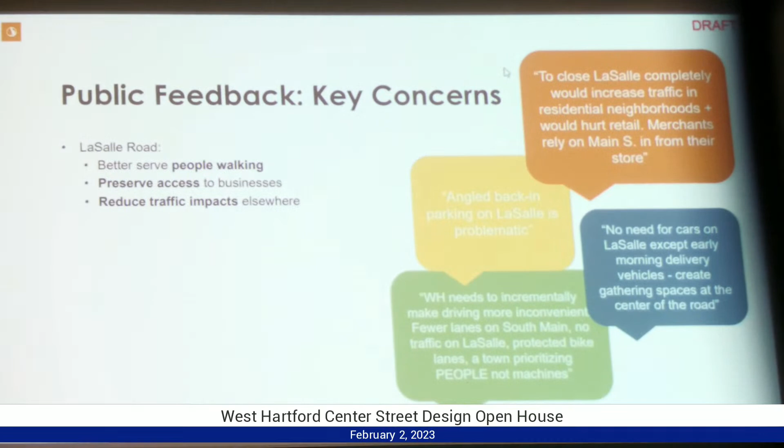Specifically regarding LaSalle, we heard a lot of conflicting things: we should close it, we should make it fully pedestrian, we should keep it one way, it's great the way it is, or we should return it to two-way traffic flow.

So lots of different, contradictory opinions as to why each of those was the most important to focus on. Similarly, we heard about the walking environment and the bicycling environment, and once again there were some contradictions in the feedback and suggestions that we got.

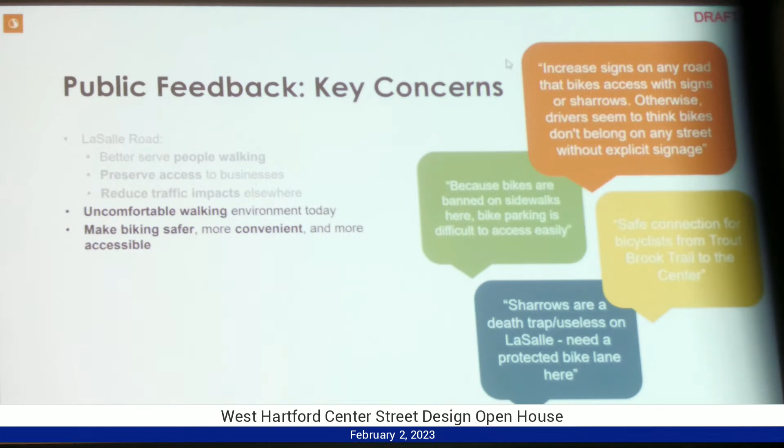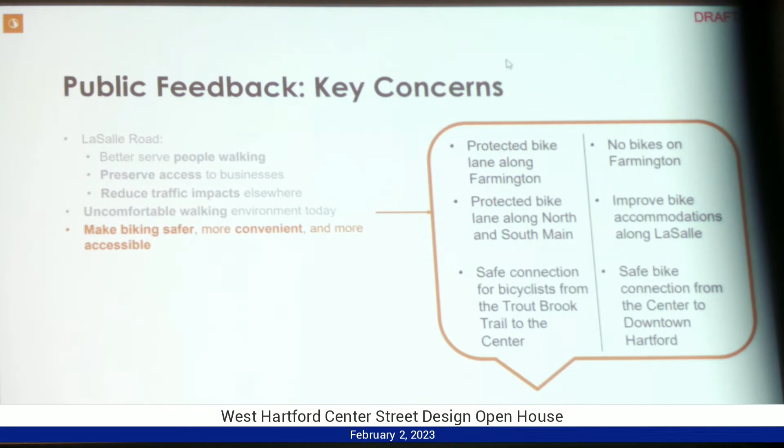So for biking, we heard protected bike lanes on Farmington should be a key link. And I don't want to see a bicycle anywhere near Farmington, that's not a safe link for people on bikes. We heard about a desire for improved bicycle connections along LaSalle for a north-south connection, as well as improved bicycle connections along Main Street for a north-south connection. So you see there are, again, differing opinions here on the bicycle network.

And again, we heard about excessive traffic and speeding and a desire to mitigate that in some way, as well as a desire for more open space to rest and interact, more benches to sit on. So we'll talk about that as we move through some of our ideas.

So I want to quickly walk through the goals that we set out with as we began this project. You as a community have come together over the past 4 or 5 years, specifically through the town center planning process, as well as the Plan of Conservation and Development. And together you've all developed these goals.

So we took these high-level planning goals that are meant to apply to land use, to zoning, to open space, to mobility throughout West Hartford, and tried to understand what those would mean for street design in West Hartford Center. We also asked folks to rank those goals.

So at the last public workshop, people had an opportunity to do so, as well as online after the public workshop. And interestingly, the goals that rose to the top were facilities and infrastructure, economic development, focusing on neighborhoods and housing for all, and finally open space and environment. So just an interesting look at what priorities are when thinking about the town center.

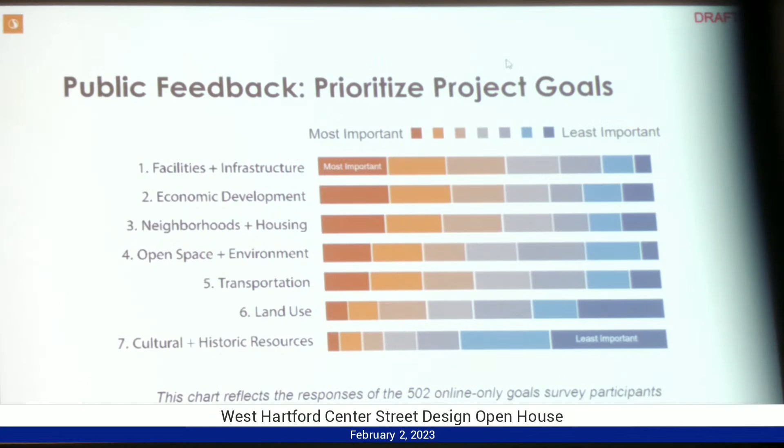So what do each of these mean for street design? For facilities and infrastructure, what this means when we think about operationalizing it into street design is thinking about planning for the future, thinking about electric vehicle charging and information and communication being built right into the street, so you can do things like real-time parking availability, real-time transit availability, and much more.

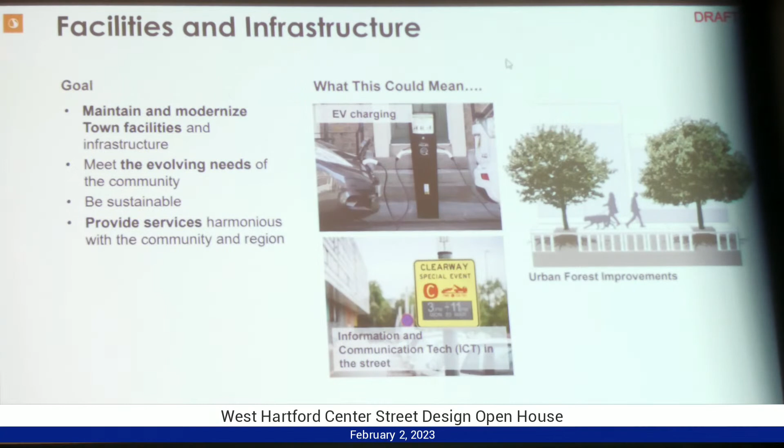It means thinking about also improving the technology that we use for plantings and tree support. That has come a long way recently, and Travis will talk a bit more about that.

For economic development, to us, what that means is using street design to promote commerce, to create space for outdoor dining, as well as to make sure that we're protecting local neighborhoods from traffic, maintaining the character of what makes West Hartford great.

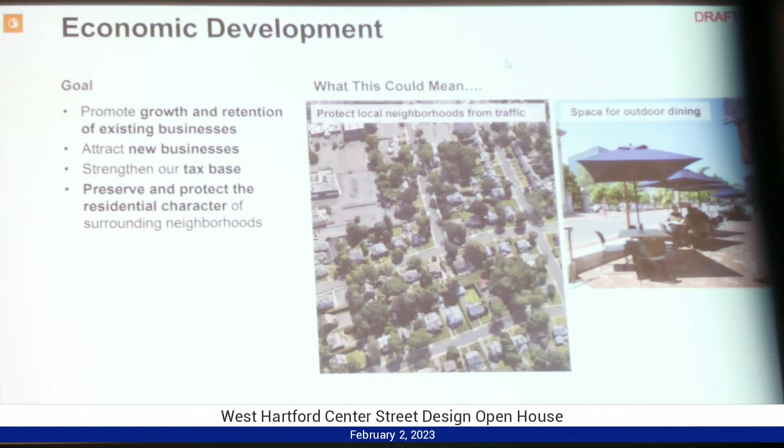For neighborhoods and housing, again, this goal was interestingly focused on creating housing for all ages. So to us, what that means is streets that are accessible to people with all different types of mobility needs, as well as interactive spaces and streets that support walking and housing downtown, so folks who live downtown can also walk to destinations downtown.

For transportation, this goal is great. It sort of hits on all the elements that we like to think of when we think of transportation in the future. But to us, what this goal means in terms of facilities on the street is planning for new transportation technology, planning for what's called an 8 to 80 bicycle facility, so a bicycle facility that an 80-year-old would feel comfortable using and a bicycle facility that an 8-year-old would feel comfortable using. And if you can plan for those two users, you can plan for all users to be comfortable.

Thinking about bus amenities, what do we have for transit users? You guys actually have relatively frequent transit service through the town center, so are we capitalizing on that? And of course, thinking about, most importantly, prioritizing safety and walkability, and getting around on 2 feet or rolling or however it is.

Open space and environment is a really important goal, particularly when it comes to stormwater management and planning for the future.

So on the street, that means space for bioswales that can help process stormwater and green infrastructure. It means infrastructure to support healthy tree growth and a good tree canopy, which provides shade, and thinking about opportunities for pocket parks, where can we squeeze in a little additional green space along the way.

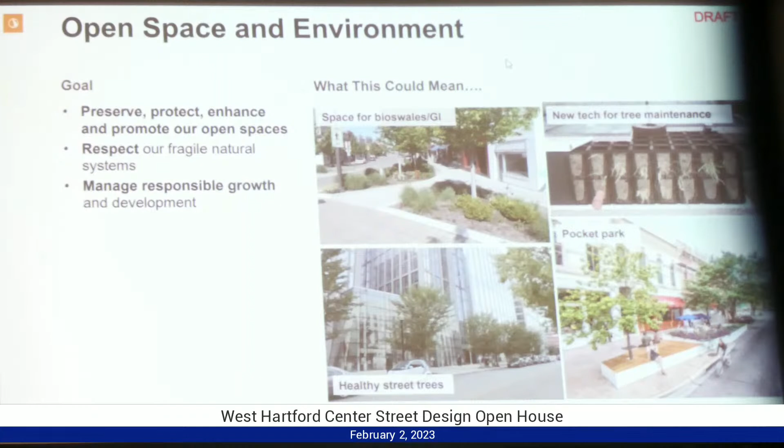Your land use goal is very smart growth oriented, so trying to think about density and walkability. To us, that translates to being able to walk to multiple destinations comfortably and directly, not having to walk around a giant super block kind of thing.

Cultural and historic resources. In the downtown, you have some great historic resources, so trying to think about integrating those into the street design as well as making them accessible to folks who are walking around West Hartford Center. Today it's a bit challenging to get to Unity Green, for example. How can we better integrate that into the town center?

So I think with that, those are all of the goals that we kind of had as our canvas as we set out to develop our designs. And now Jason is going to talk a little bit about some of the technical analysis that we've done.

Thank you, Liza. So we're starting with vehicles because that's the thing that everybody's always worried about. It's the number one concern that comes up in the transportation planning and engineering trade. But frankly, it's changed a lot over the last 10 years. Over the course of the last 20 years, we've been much more focused on other modes of transportation, but recently it's all about safety, and making it work for all modes as safely as possible.

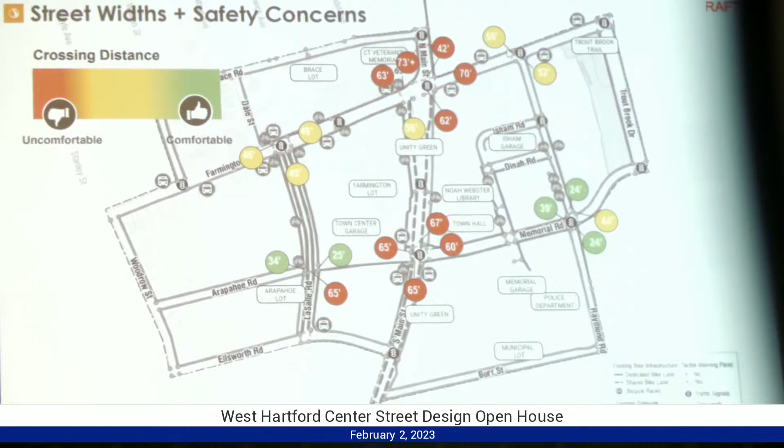It's that the intersections are too big. All those little dots are the lengths of the crossings. Even where you may have a median breaking it up, say the north side of Farmington when you try to cross Main, it's still a lot of distance, over 100 feet from one side to the other. So we look at any gap that really breaks a good 20, 30-foot crossing as a threat, and you've only got a few of those in green. Yellow gets to be a concern. All those large intersections directly correlate to those crashes, and that's something we know we need to re-engineer and think about what's going on.

One thing you all need to decide, and is influencing our design, is how much should we care about letting people from out of town blow through? Now, admittedly, some of them may be residents just trying to get home from Hartford, and they come through on Farmington. But in the town center, is it appropriate that we have roadways focused heavily on this movement, or should we be thinking about them a little bit more as a place?

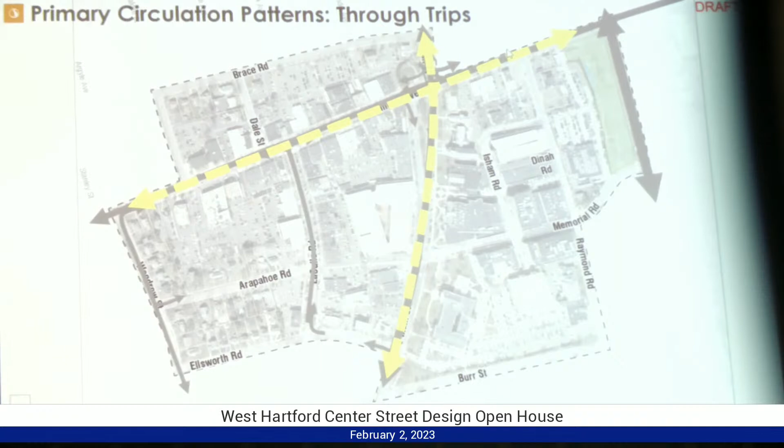And so there's also things about place that are important. There are employees coming in and out - that's probably the second greatest amount of traffic pattern that we've seen circling around. You actually see this funny little circle coming out of the town center garage and looping around all the way down to Ellsworth and up LaSalle. That's actually because they can't go through on Memorial to get to the west, and they don't like to turn left and left through Farmington. So that's something we've thought about, is how can we connect Memorial maybe to relieve that pressure, though it's only on Ellsworth, but it's something to think about.

But then the other big and often most publicly perceived traffic circulation is actually hunting for parking. And regardless of where you're going, that big central block, this whole area here is actually more or less a super block. You can't drive through. You can sort of cut through a parking lot.

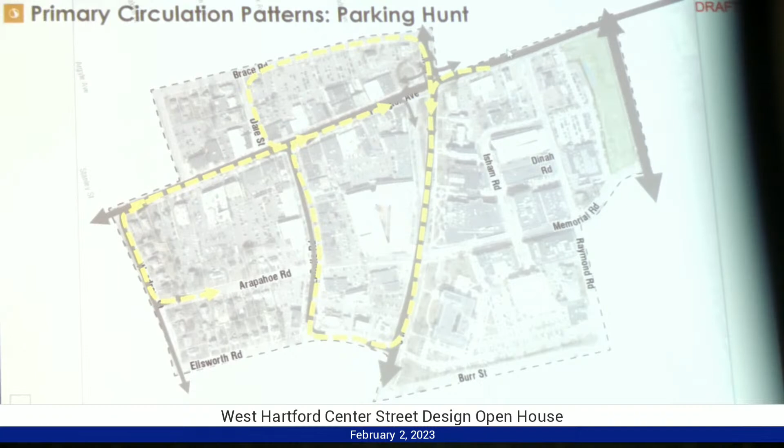That means there's a lot of circulation hitting all those intersections out there when people try to find parking. They may come around on Brace, and they may go past because they can't turn down LaSalle now to hunt for parking. There's a variety of those moves that we saw. And the parking hunt in particular is interesting because we all know that's important for businesses.

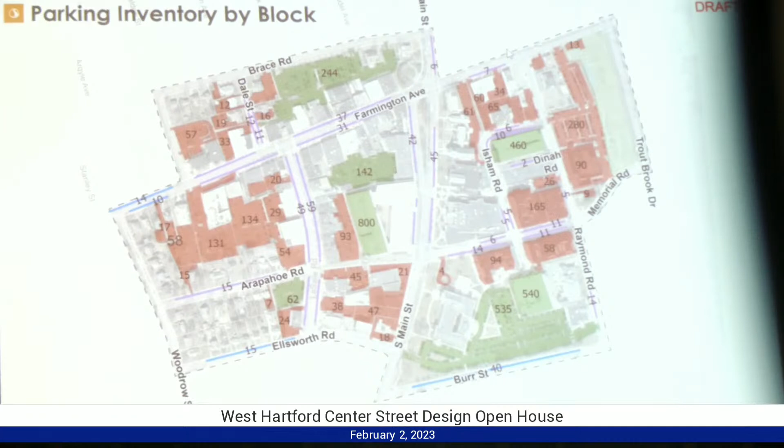It's important for the vitality, and it's important for residents to be able to get downtown. But there's actually a lot of parking, so they're hunting for something. They're usually hunting for a convenient on-street space, because if I were to summarize that detailed inventory map, this is sort of the block-by-block summary, there's a lot of parking. Combined in this whole study area, there's over 5,000 parking spaces, and it's actually well divided. Those garages over in Blueback Square make you think there's more there. Actually, Town Center Garage and the lots over by Town Center have a pretty good amount over here on this half too, and it's actually really well located.

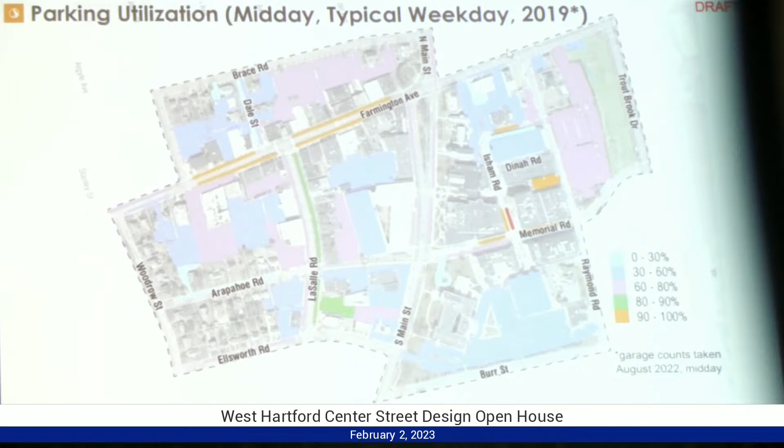When people think about parking and access, they also think about what they pay. When I look at the prices for all of these things, they're actually sort of flat. That's one of the problems we've determined. This is a heat map of utilization of all those different places to park. Where it's orange, it's really heavily utilized, but where it's blue, it's not as well utilized. You'll see the garages in the center of the blocks have those blues. I'll summarize it a little more cleanly.

In the middle of the day, this is data from back in 2019 when we were really robust and busy for parking. We're probably close to that again now. You can see Farmington Avenue gets pretty busy. The Blueback Square on-street area gets a little bit. LaSalle's not quite there, but notice the garages - in the middle of the day the garages are really not being heavily used at all.

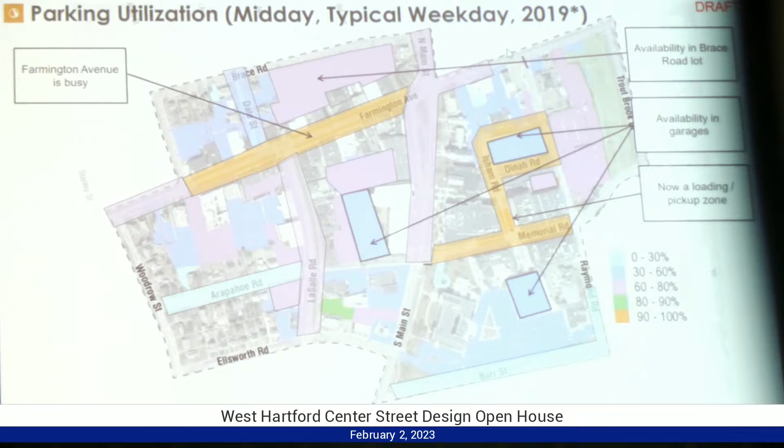Your problem is at night, right? The streets are filled up. Look at all that orange. All of a sudden, all those streets, you can't find parking almost anywhere. But look at all the empty spaces - there's no less than 1,500 empty spaces in downtown West Hartford. So everybody's running around, driving on your streets, looking for parking because they want the front door space.

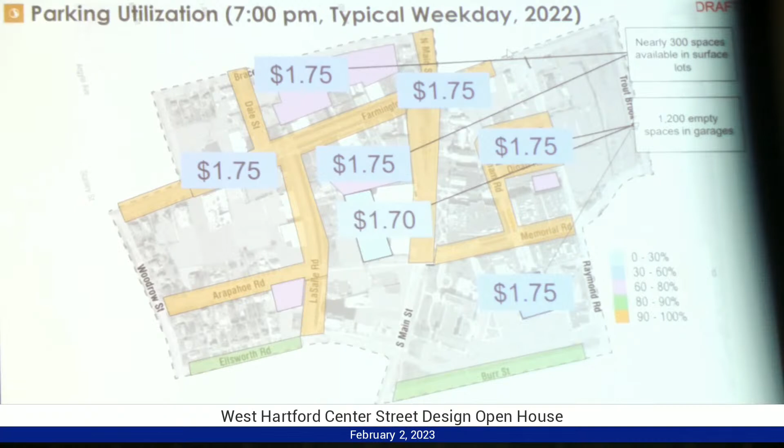My goodness, can't we just make it easier to find a garage space? Can't we, through maybe an infrastructure master plan, make it easier to want to walk to a garage, make it more visible? Maybe we as planners should rethink that pricing, and instead of just having a flat rate, maybe change it so it's a little more expensive on the streets and actually really cheap in some of the garages. Tiered pricing is a very strong best practice, and in most communities it creates the availability folks want and actually encourages more people to come into your downtown.

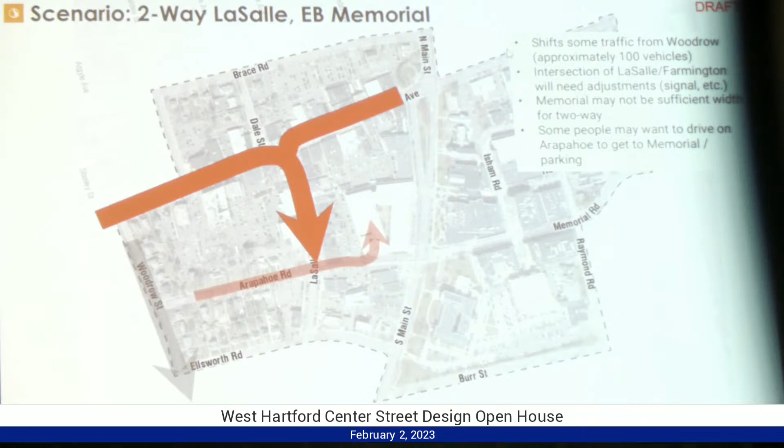If we only did the two-way, which is another option we're thinking about, that makes a lot of sense, and we're suggesting this to the town that we like this option maybe the best. There might be some people who come across, but that volume is really no different than exists today for the most part. So you'd be able to pull a lot of the pressure with a two-way LaSalle off of Woodrow.

We also looked at closing LaSalle. A lot of people mentioned this. To be clear, when you have special events or things going on LaSalle, particularly on weekends, it's an excellent street for doing that, and you'll see as we get into the design we've made it even easier and better to do that. But if you were to close it in this PM peak hour of traffic, the impact on other streets, particularly a street like Woodrow, would really be significant because people just can't get through.

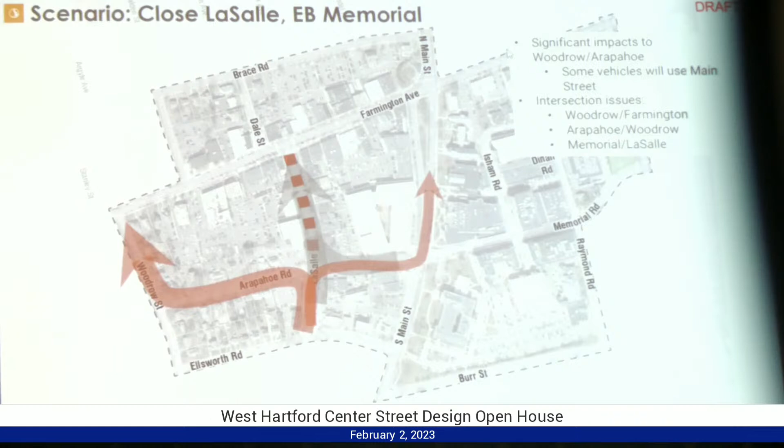There's just not enough breaks in that big super block, even if I opened up Memorial, it's going to be really impactful. The other reason why we know that closing off LaSalle all the time is problematic is that in about 90% of attempted pedestrian mall street closures in America over the last 40 years, they failed. There's very few that were kept in place, so many were removed, and many transitioned to temporary closures, which is a good solution. But we know that if you take a lot of cars off the street, you take a lot of eyes off the street, and you take a lot of activity off the street.

It doesn't mean everybody should be driving, for sure. We want them more to walk. But this is still America, there's still a point where people arrive by car. Until you have all sorts of light rail and lots of bike facilities and everything coming into here—and we're about to talk about bike facilities—we should probably not think about closing it down entirely, but we may want to think about closing it down periodically, even weekly.

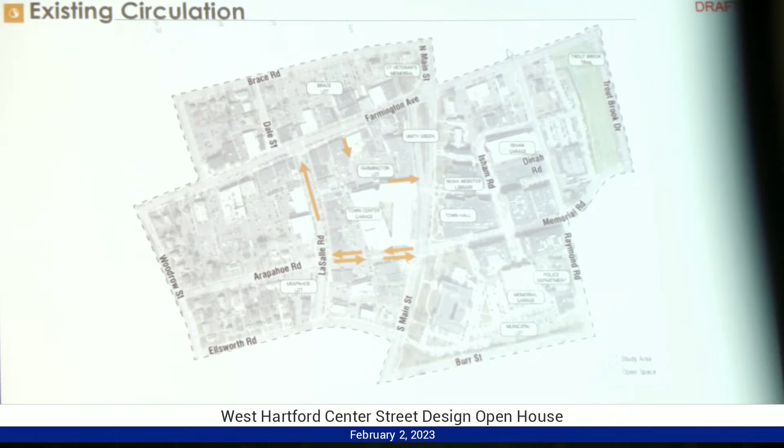So in summary, what we're seeing today is a one-way northbound LaSalle and these two little broken up two-way sections of Memorial. And by the way, the Farmington lot with the one-way in off of Farmington and exiting on Main—we see all of these as problematic. So that analysis suggests to us that instead, LaSalle becomes a two-way street, which is what we're recommending. We at least have one way all the way through on Memorial, and we actually flip the entry and exits for the Farmington lot and make Main Street a new entrance to that main lot.

It's actually a really good way of making it safer for crossing that sidewalk where we've had a lot of complaints. And as you'll see, there's some concepts for actually making that a nice gateway. Exiting here is very easy because there's already a signal. So we think we may want to make that switch relatively soon.

So as I mentioned, bicycling is another great opportunity. Liza.

So we took a look at the existing bicycle network in the town center, which you can see on this map shown in green, and it's relatively disjointed today. You have bike lanes on LaSalle, you have sharrows on South Main where there's a painted bike with two arrows in front of it in the lane, meaning bicyclists are meant to share the lane with people driving. But as far as trying to connect to anywhere, there aren't a lot of options.

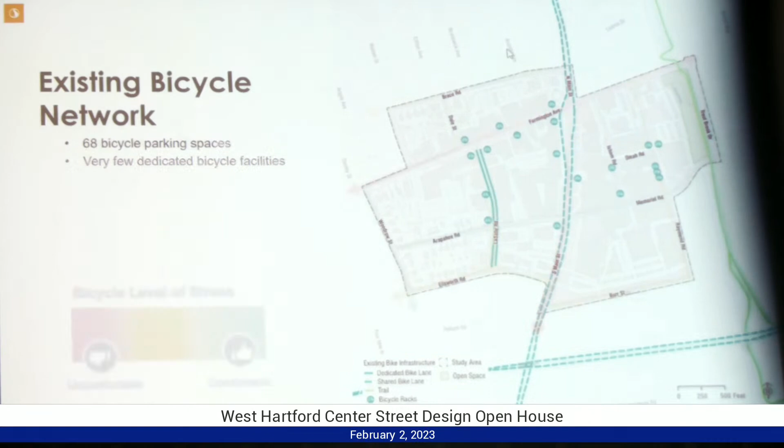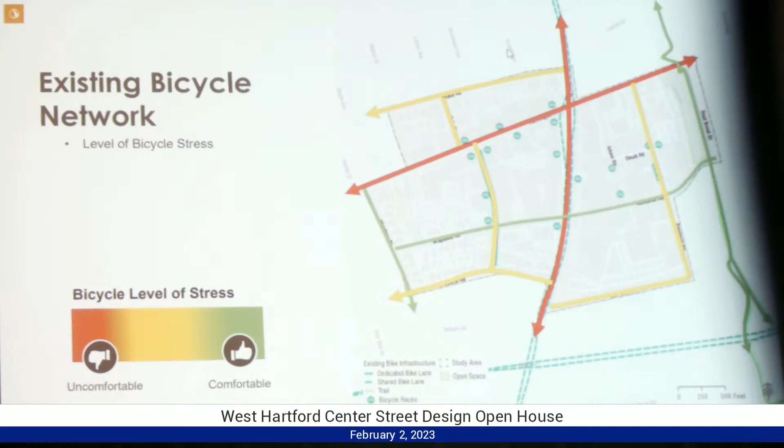So we did a really rough bicycle comfort analysis, where you essentially look at how many lanes, how much traffic, how protected the bicycle facility is. This map shows the rating of the different roadways throughout the town center. You can see there's not a lot of really safe feeling east-west connections. Right now, Memorial, which doesn't even technically go through, is kind of your best bet if you want to travel east-west through the town center.

We also took a look at—you have on the books a bicycle facilities plan, and I believe there's a plan to update that in the future. But that plan at the moment recommends that Boulevard be the east-west connection. So what did we hear from folks? Again, we heard a lot of conflicting ideas and some really good ideas.

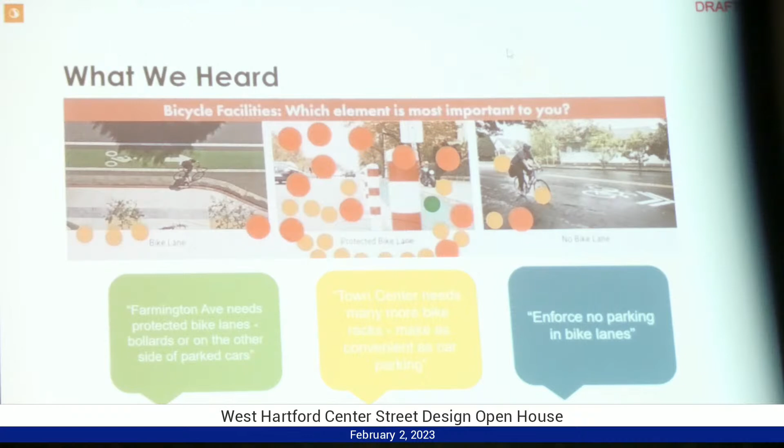But interest overall is in being able to get both to and through the town center, and once you get there, have a place to park your bike that's secure, comfortable, and meets all the standards. So what we would propose is that Farmington become that east-west link.

Interestingly, on its edges, Farmington Avenue already has bicycle connections. Over in Hartford, they have painted bike lanes, one on each side, and similarly down by Wardwell Road there are painted bike lanes, one on each side. So we want to think about not only connecting to and through the center, but where are you connecting from?

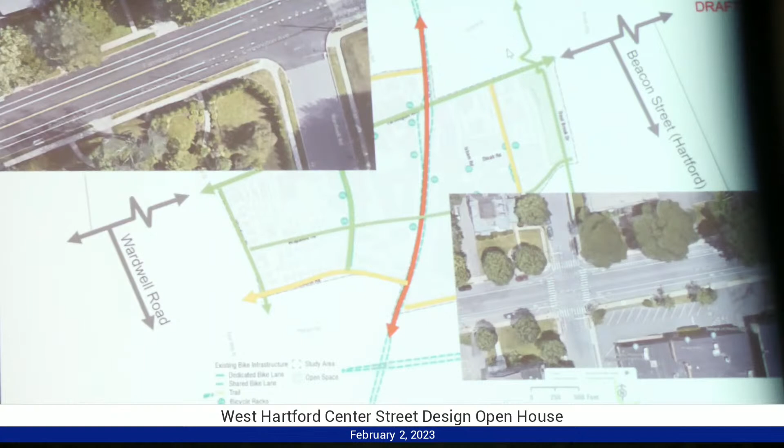So we looked at a few different options for type of bicycle facility, and this is ultimately the one we're going with. Each option has pros and cons associated with it. This type of bicycle facility is actually at sidewalk level, if you can see in these images.

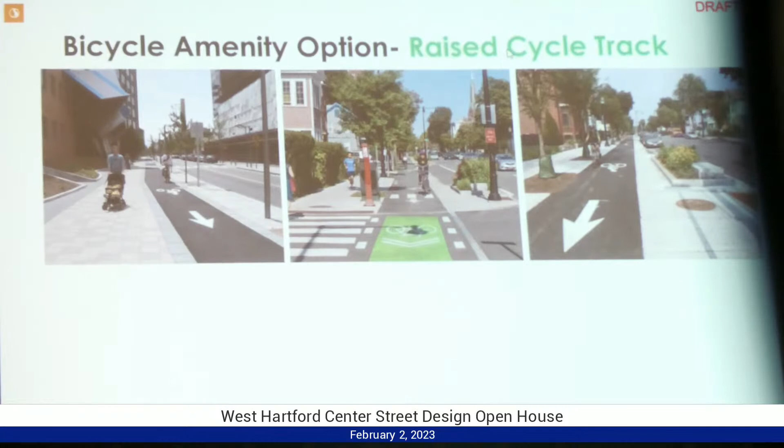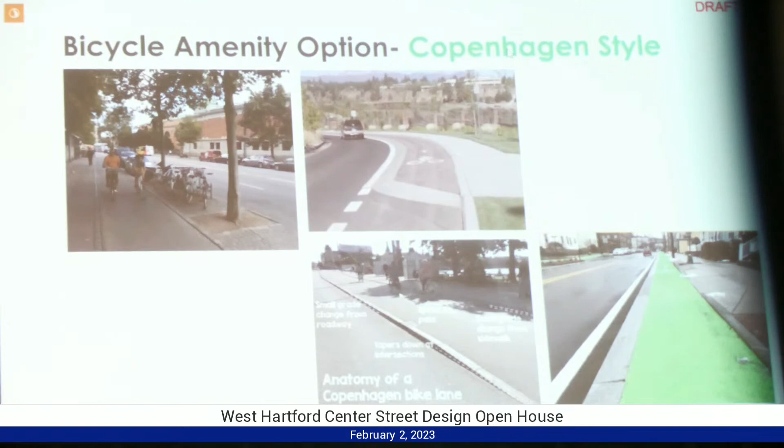And then finally, there's an option which is a Copenhagen-style bicycle facility, where you have your sidewalk level, your street level, and kind of halfway between the two, your bicycle level. Challenges here again include maintaining it, because you'd have to look at snow plowing and keeping it clean. The advantage is that you don't need as much of a buffer between people walking, biking, and driving, because the level change provides that buffer to some extent.

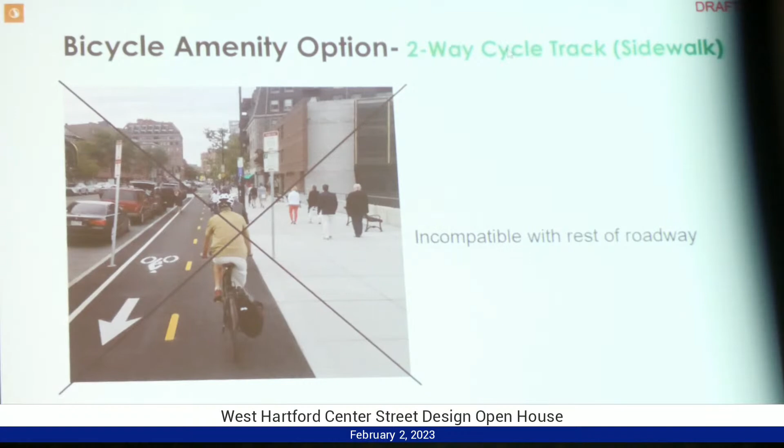We also looked at what's called a two-way cycle track, where bicycles move in both directions on the same side of the street. Ultimately, as I mentioned earlier, Farmington Avenue on the east and west has bicycle lanes on both sides, so if you were to transition from a facility like this to a facility like that, it can get pretty complicated in terms of what happens at intersections. So we ultimately put this to the side, but we did consider it.

So with that, I'm going to turn it over to Travis, who's going to talk a bit about walkability and public realm.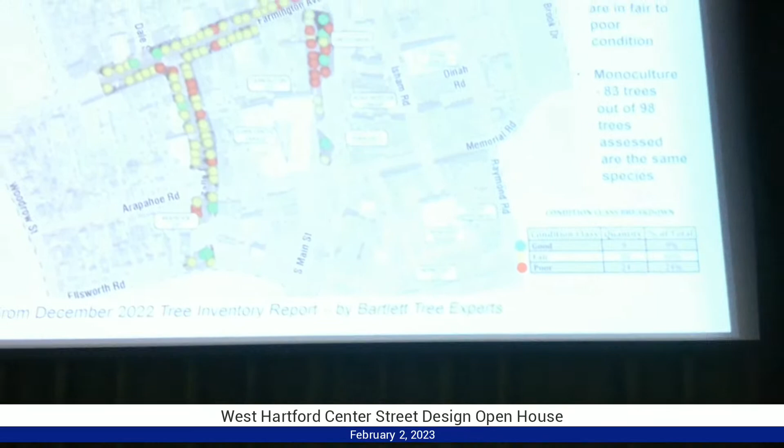All right, so we're going to start off with one of the most defining features, or at least from my perspective as a landscape architect, the trees in the town center. They're a defining element, but they're experiencing some decline based on the amount of soil volume in their tree pits, as well as it being a monoculture of tree types.

It's a Gleditsia triacanthos, which is a honey locust. If you look at some of the percentages, out of the 98 trees studied back in December by Bartlett Tree Experts, 83 of those are honey locusts. They're a very high-valued element in the public realm in that they mitigate heat island effect and filter stormwater. So as we progress, we're looking at what we can do to mitigate any potential loss of these trees in the future.

So just some imagery of the existing conditions in Blueback Square. There are some really healthy trees there, some generous tree pits, and some trees now experiencing endemic diseases that will have to be dealt with as time allows.

And then in the town center, you can see here where some of the honey locusts are experiencing infection from fungus. They're also experiencing damage to the root system, where they've really maxed out their tree pits. So the way to grow big trees, and we'll touch on that, is to have soil volume.

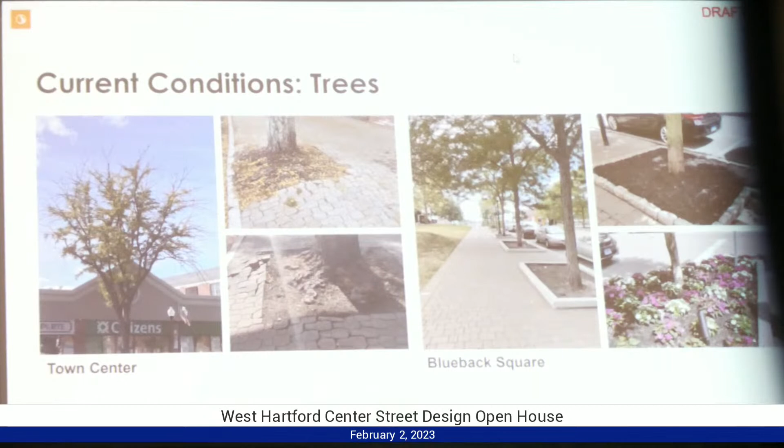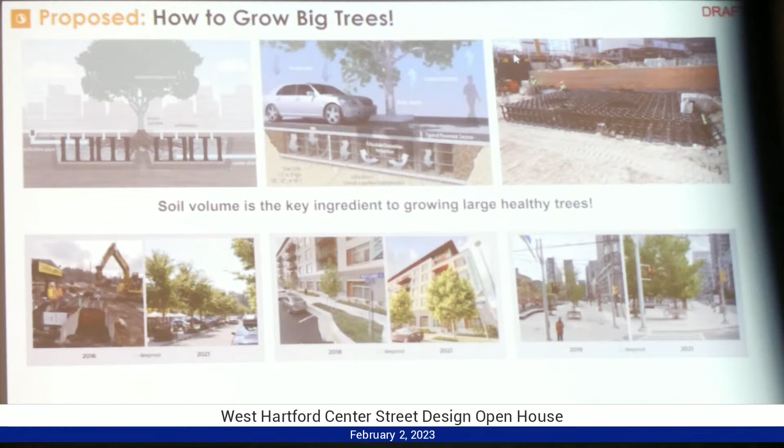This slide is showing that. So there's the old style of street tree planting, where you dig a hole and plop the tree in a 5x5 pit. But unfortunately, that's just not enough soil to sustain a tree for a long period of time. So what we're looking at here is a new technology called a soil cell system, which suspends the surrounding pavement and allows you to achieve huge soil volume amounts, allowing the trees to reach their full potential and live a healthy life.

One key element we're looking at is native trees, native to Connecticut. We're seeing lots of bird die-offs, and that has to do with insects being lost. So we're looking at tree species that encourage beneficial insects that will promote bird life, and trees that can tolerate the urban condition, whether that's salt tolerance, drought tolerance, and things of that nature.

Again, we're going to be thinking about green infrastructure, so what are the appropriate plants at the ground level that will encourage pollinators such as bees and butterflies.

Then looking at the public realm from the hardscape perspective, whether that's the pavement. We know there are a lot of upgrades and potential upgrades to happen—Blueback Square, which was built not so long ago, and then looking at Town Center and the potential for some dramatic upgrades.

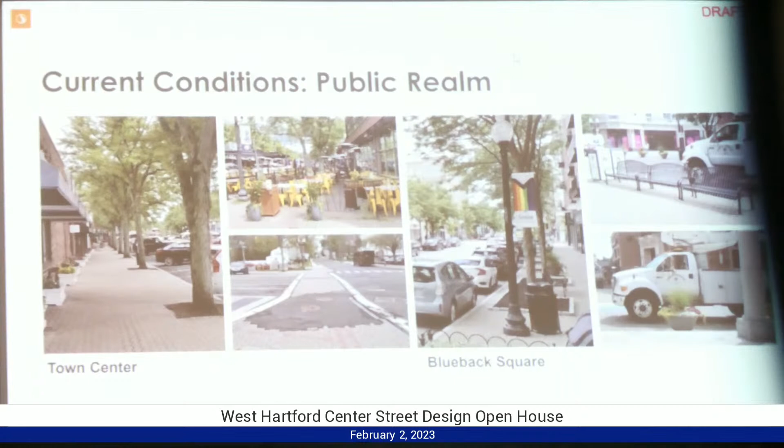Just to touch quickly on this, the lighting in Blueback Square is regularly spaced, same thing within the Town Center. There's a general lack of seating in the Town Center for the public, so as you walk along LaSalle and Farmington, there aren't a lot of benches, whereas Blueback Square has a lot of those streetscape amenities.

With that, I'll pass it off to Liza.

Quickly, we did a comprehensive review, as Travis was mentioning, of where the benches are, where the planters are, where the wayfinding signage is. That's generally what all these little dots on the map are. You can see there's a big gap along Farmington Avenue and along LaSalle Road, and both of those present an opportunity to integrate more of these streetscape elements into the design. The other place there's a gap is between Town Center and Blueback Square.

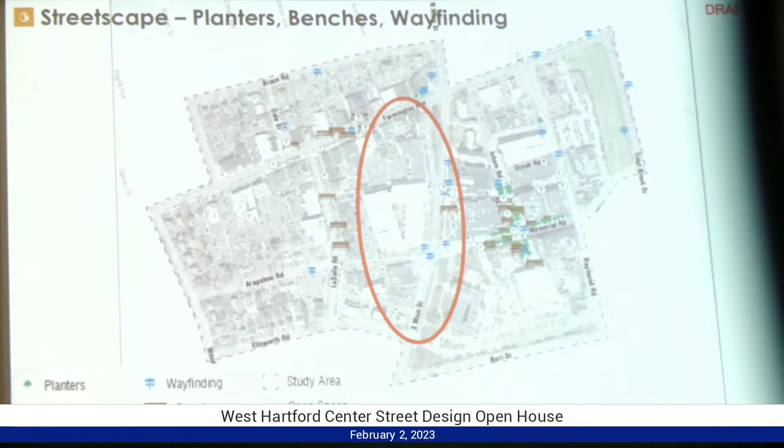At the last meeting, a lot of you talked about the desire to better connect those two and have it really all feel like one town center. So we also think this is an opportunity and something we should be looking at as we think about the overall town center.

We also did a review of walkability, as Jason was mentioning. So we looked at crosswalk length, but we also looked at where the crosswalks are and what they look like—what type of crosswalk are they, what type of crossing opportunity do they afford. Today you have a variety of crosswalks: some that are really nice, high visibility crosswalks painted onto the ground, and some that perhaps have seen better days and it's time for an upgrade.

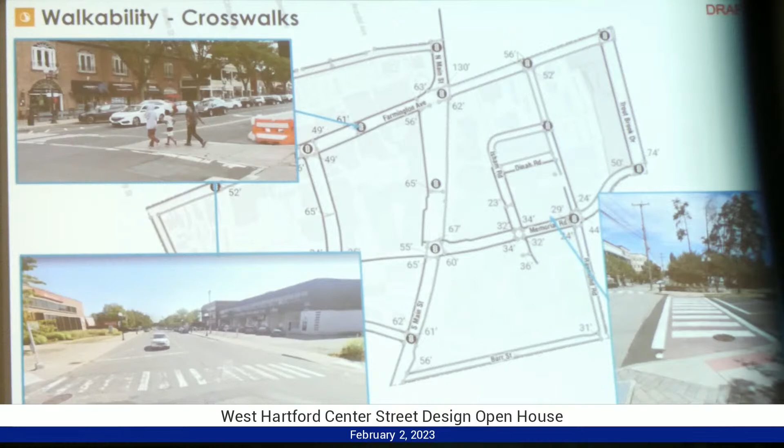So we're trying to look at every intersection and opportunities to create more crossings. And of course, there are places where today there's actually no opportunity to cross. For example, along Brace Road, if you live in the neighborhood north of Brace Road, the built environment is telling you today that you can't cross the street and come down into the town center. So we want to look at gaps like that and think about how we can encourage walkability not only within the town center, but from the neighborhoods that surround it.

So with that, I think I'm going to turn it back to Travis, who's going to talk a little bit about streetscape. Yeah—oh, I'll go into these first, sorry.

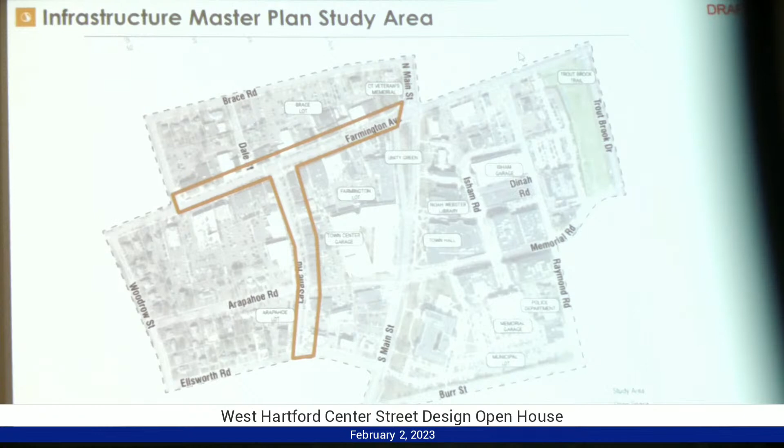So we have the overall master plan, looking at the overall study area. And as Travis mentioned at the beginning, one of our focus areas is actual construction documents for LaSalle Road and Farmington Avenue. Tonight we have a couple of proposals for those designs—you can see those at the back, and Travis is going to walk through them.

But I wanted to mention first that at the first public meeting, we asked what's most important to you in terms of what we do with the street space: dedicated outdoor dining, widening the sidewalks, providing bicycle facilities, or providing angled on-street parking.

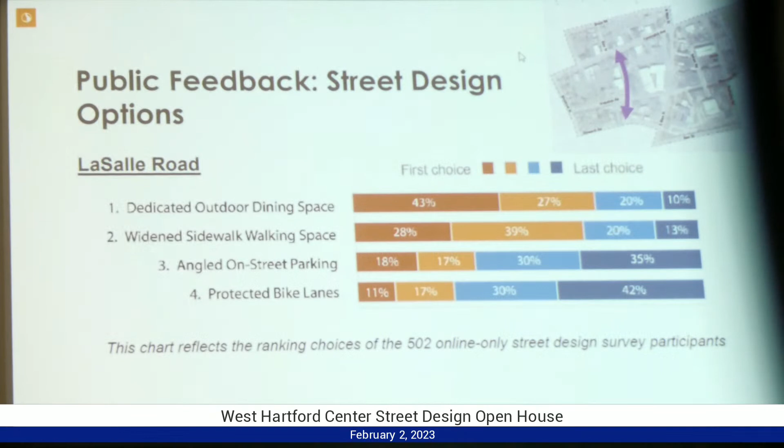Interestingly, the responses here—red is the first choice, dark blue is last choice—show that Farmington Avenue looks different from LaSalle Road. On Farmington Avenue, folks prioritized outdoor dining and walkable space, but felt less attached to angled on-street parking and thought bicycle facilities were more important. On LaSalle Road, those two flip-flopped. We took that into consideration as we were developing these designs.

So now with that, I will hand it off to Travis to talk a bit about the two roadway designs.

Just touching on a few of the design goals: create a gateway to the town center, provide a safe and comfortable walking environment, improve economic development—it's already very robust, but whatever we can do to improve it—and enhance the streetscape character, along with a lot of the other things Jason and Liza just touched on.

Here we're extending the curb outwards towards the center line of the road. We're providing buffer space for this new cycle track on either side of Farmington, and then a furniture zone, which would include street tree planting, lighting, benches, amenities of that sort, and then improving the amount of clear walkway space considerably.

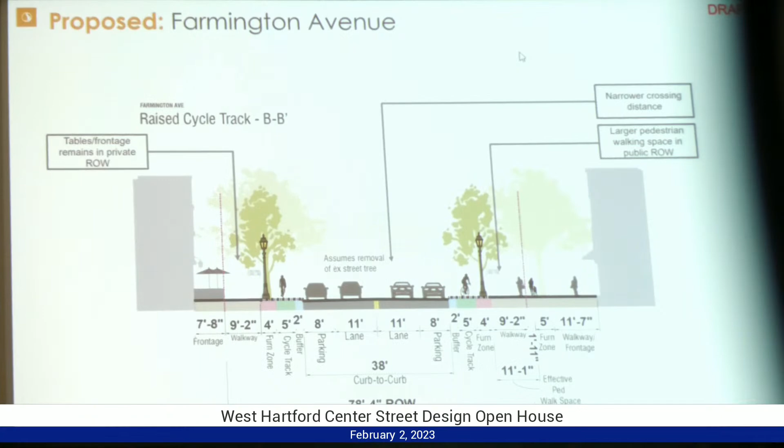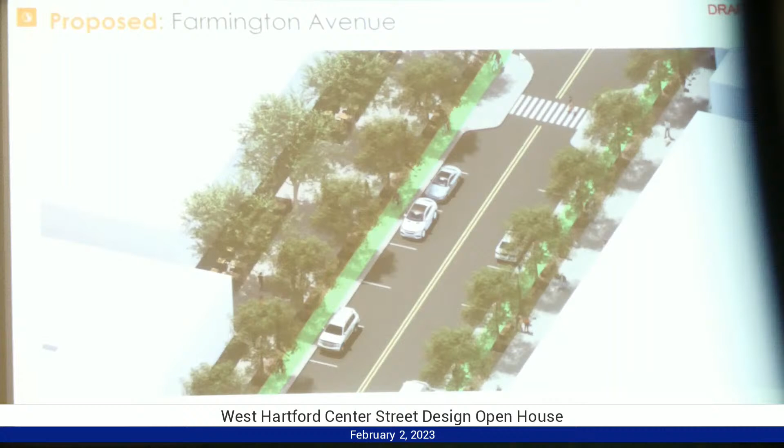Looking at this from a 3D perspective, what we're showing in green is just a diagrammatic tool to help communicate where the bike lanes would occur. You can see how that bike lane would be against the curb, with a 2-foot to 3-foot buffer zone, so when car doors open, nobody on a bike gets car doored, God forbid. In red, in this brick strip, there would be street tree planting, lighting, benches, and things of that sort, and then dining amenity zones on the other side, hugging the buildings.

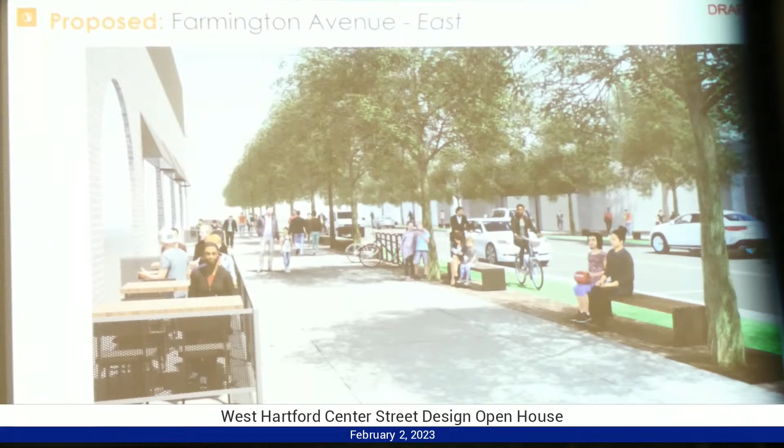At the ground level, this is what it would look like. You can see the amenity zone there with people having lunch, dinner, whatever, and then the streetscape amenity zone, which would be benches, bike racks, lighting, and street trees. Just another view there, looking down.

Just wanted to remind folks: for Farmington Avenue, we had prioritizing of outdoor dining and widening the sidewalk space, and then the bicycle connection. For LaSalle, those two flip-flop. So with that in mind, we created our LaSalle Road design.

On LaSalle Road, what we've heard from folks was creating a destination street and really enhancing the streetscape character, creating a walkable environment. Looking at the center line of LaSalle, we have a 70-foot curb-to-curb dimension, even wider than Farmington, so quite a bit of roadway dedicated to vehicles.

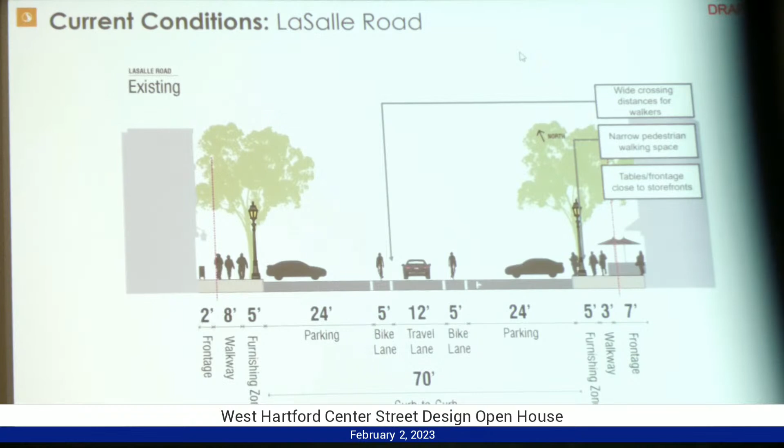In the new concept, the idea at this point is reducing those travel lanes to 10 feet, still providing on-street parking with 8-foot parallel parking lanes, and then having this more ample furniture zone at 8 feet.

We've gone back and forth between proposing a dining amenity zone outside of the right-of-way line, within the public realm, with a 10-foot clear walkway, and in option 2, anchoring the dining zone to the building. So it's really something for us to discuss tonight.

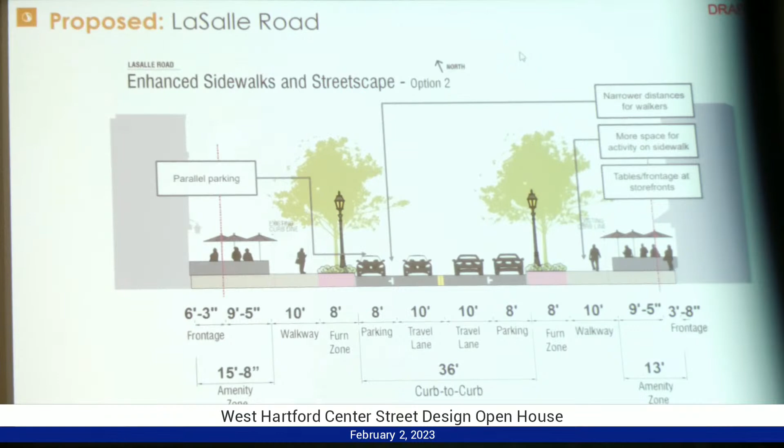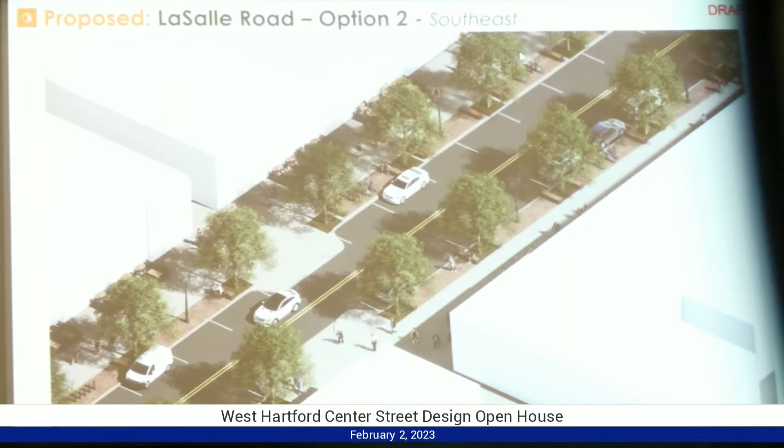The alternative is to anchor the dining amenity zone to the buildings. This is what it would look like at the ground level—kind of similar to what it is today, but extending and making that sidewalk much wider and creating more of a public amenity.

Another option we're ruminating on for LaSalle is creating a curbless street. We know we've heard from folks about wanting to fully shut down LaSalle, but we think this could be a really interesting option for temporary festival events, creating a more fluid cross-pedestrian access across LaSalle.

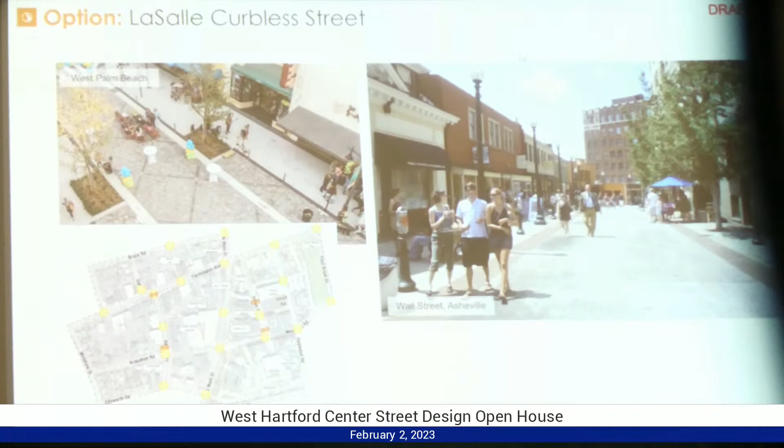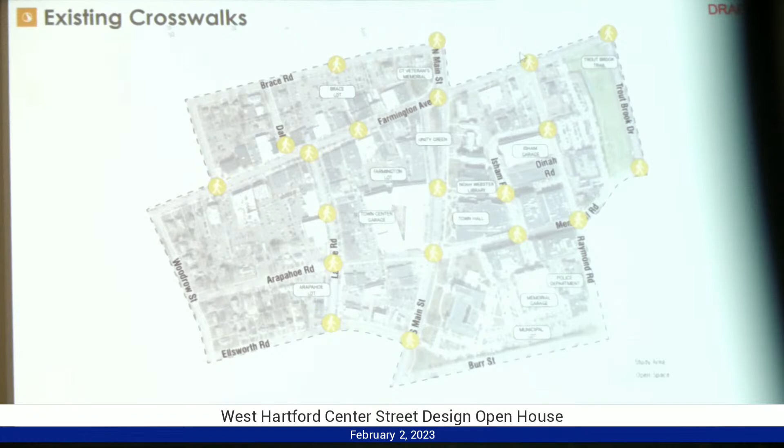So we're also thinking about the overall town center study area. As I mentioned earlier, we did an inventory of where there are existing crossings today. What we'd propose for the future is that each and every one of these be considered for curb extensions, improved crosswalks, and narrowing down the intersection to make it easier to get across. And of course adding additional locations that are missing today, which are preventing folks from walking to the town center.

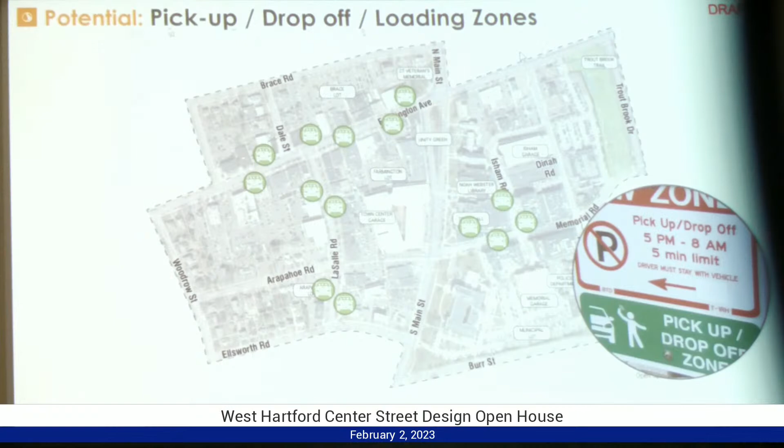We looked at where there are loading zones. That's going to be very important moving forward, loading of both people and goods — Uber, Lyft drop-offs, as well as big trucks making deliveries. Today those loading zones are relatively limited. We would recommend that they be better dispersed throughout the town center. One loading zone for a rideshare space can serve up to 20 people an hour instead of one car sitting there empty for a whole hour. So we think that's a really productive use of that front door curb space.

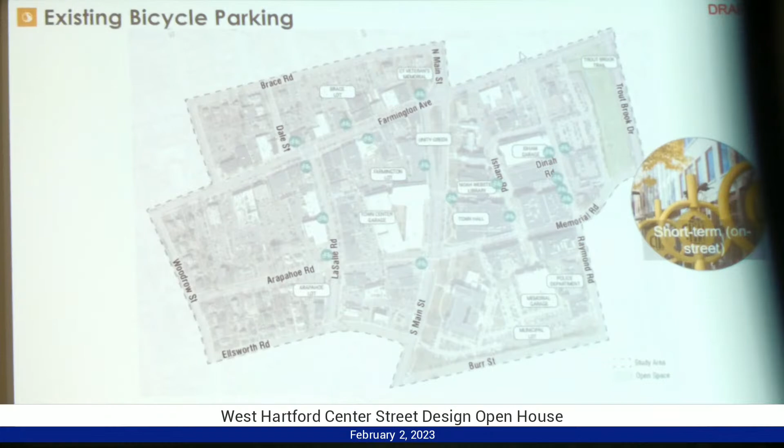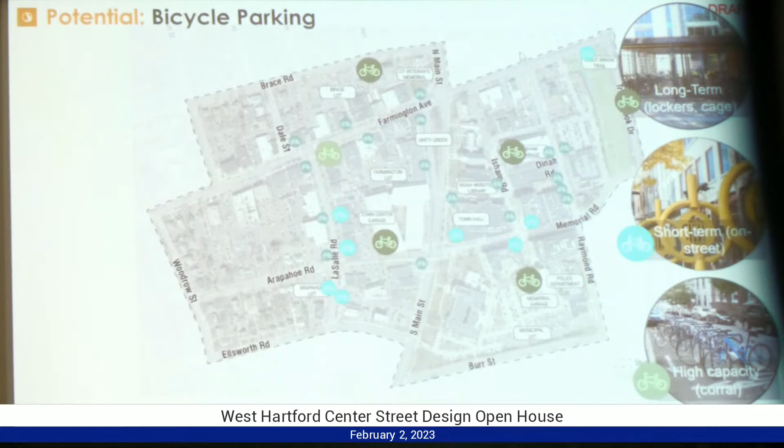Another thing we took a look at is the type of bicycle rack available, and whether it meets standards for securing your bicycle and accessing it without damaging the frame. We'd recommend looking at three types of bicycle racks throughout the town center: secure bicycle parking for longer-term use or for folks concerned about their bike — especially since e-bikes are getting more popular and are relatively expensive, so having a secure place to lock those up would be nice — as well as locations for higher-capacity bicycle corrals that can take a whole bunch of bikes together in a pretty confined space.

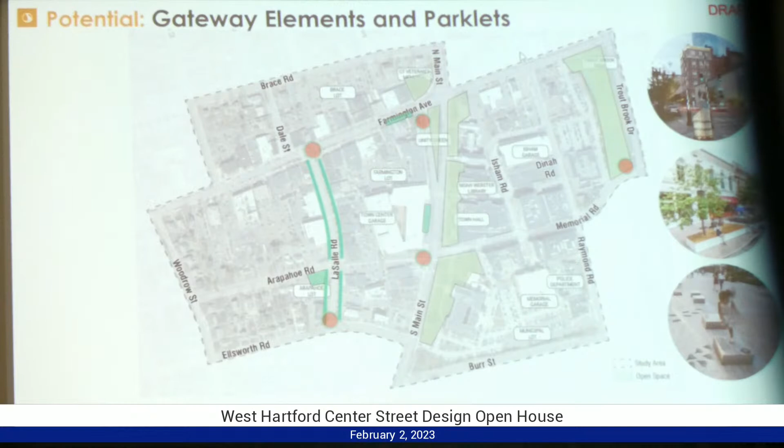We looked at existing green space today, and we know that's relatively limited. So we're looking for additional opportunities to integrate pocket parks — little mini green spaces, places to rest — as well as public art. What's nice about public art is it also contributes to creating gateways to the town center, so that as people walk, bike, drive, or come in on transit, they're aware they're arriving somewhere — that something is happening here. So we're thinking about locations for these.

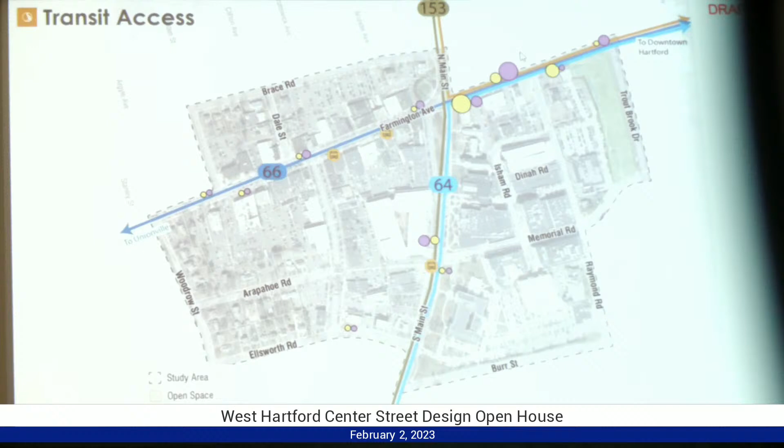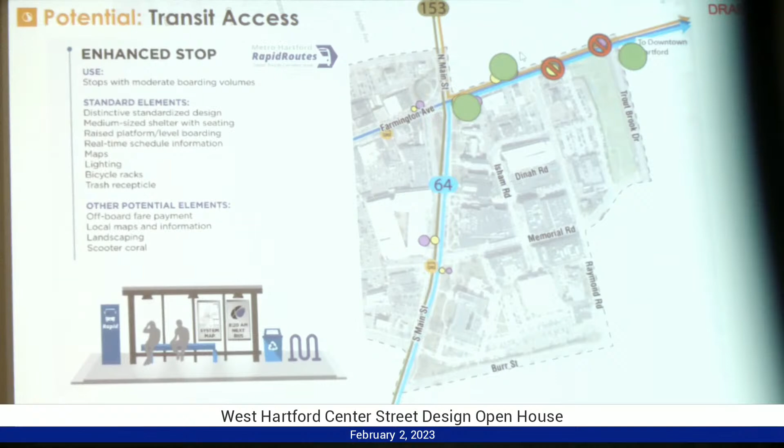Speaking of transit, as I mentioned earlier, you have relatively frequent transit, particularly east-west, and Farmington Avenue to the east of South Main Street has been identified as a high transit capacity corridor. CRCOG, the local metropolitan planning organization, did a study recommending eliminating some stops along Farmington, which can make the bus run more quickly if it doesn't stop every block, and upgrading those stops to have real-time information, a comfortable place to wait, a trash receptacle — basically everything someone riding a bus could need.

And with that, I'm going to turn it over to Jason, who's going to talk about some of these principles at other intersections. And yes, we are almost done.

These are strictly conceptual ideas. They may look pretty drawn up, but we can do that relatively fast — we're at that early ideation stage. Looking at the overall master plan area, there are some locations not specifically on LaSalle and Farmington that we need to think a little creatively about in the future, so we'll come up with a master plan that may suggest some of these. Afterward, we want you to look at these in the back, along with the cross sections Travis talked you through and many of the other public realm items.

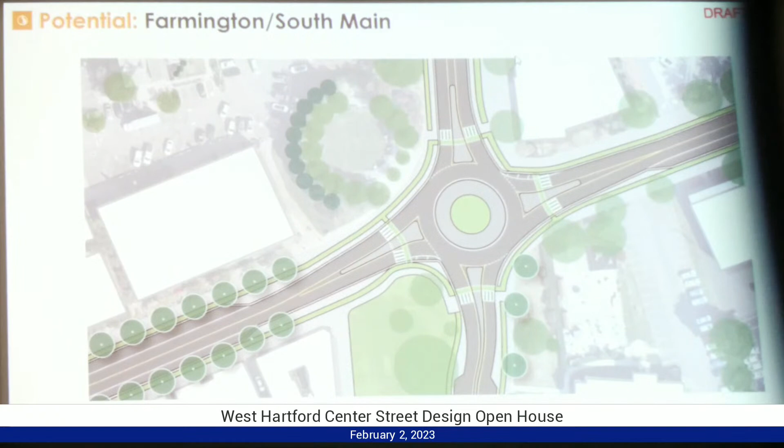So we want you to look at all of those in a few minutes. Another thing is about the green itself. This is trying to say, if we were to reconceptualize, as I've already hinted, with all the traffic on one side, what would the green look like, and what can that possibly do?

This is very conceptual. If in the future it doesn't really need to be a 5-lane roadway, which is what we're suggesting, it can easily be dieted to a 3-lane roadway, which is exactly what you've done just north of here on Main, north of Farmington. There's every traffic engineering number supporting continuing that all the way down to at least Broadway. There's just not enough cars to warrant 5 lanes.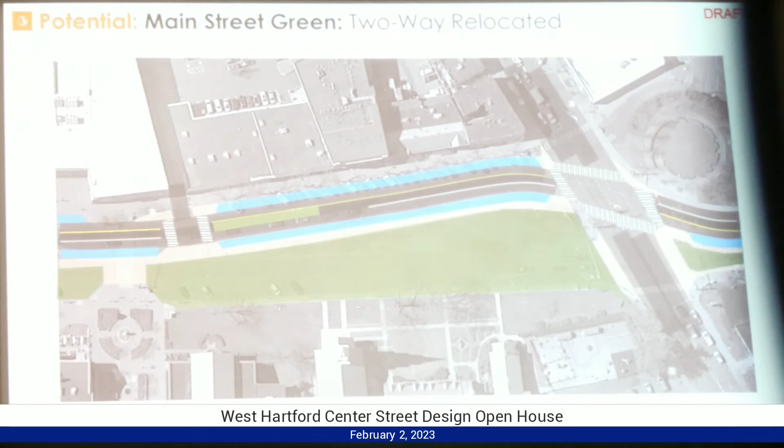We could also do everything we just talked about, but flip it to the other side. A narrowed, again 3-lane roadway with turn pockets to be able to make the moves, but right up against the businesses, maybe with parking on Unity Green. What this actually does is make Unity Green space even bigger, because the green spaces in front of the church and the library are really kind of set back and inactive. We didn't want to draw anything on here, but what this space could become in terms of a real substantial common is quite notable.

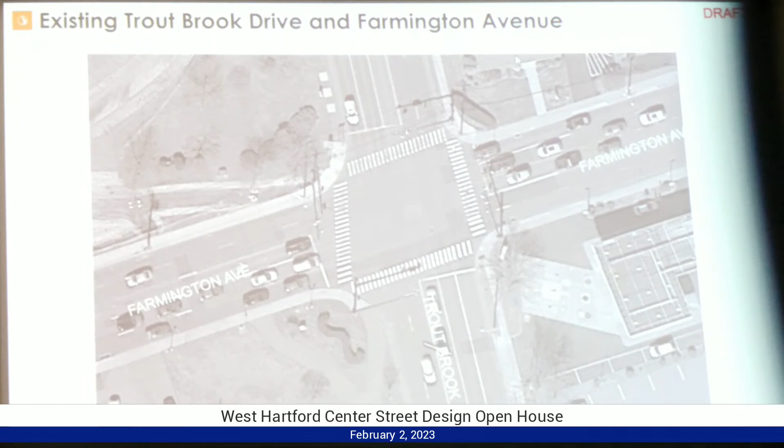So all those options are on the back. Really briefly, 2 other intersections I'll talk you through. Because we know that we can drop Farmington from 5 lanes to 3, we're not necessarily going to push it that far for Trout Brook, because that does have pretty substantial volumes on it, but you can imagine this intersection even being easier to cross, because Farmington doesn't need all that width.

So we can get nice crosswalks, we can put in that continued bicycle facility, and it can be in paint for now, which is what the town has done to the east and further to the west. You can even envision those cycle tracks on Farmington in our core design area, continuing all the way east to Trout Brook. Now, lastly, I'm going to talk quickly about Memorial at South Main, a little bit further south.

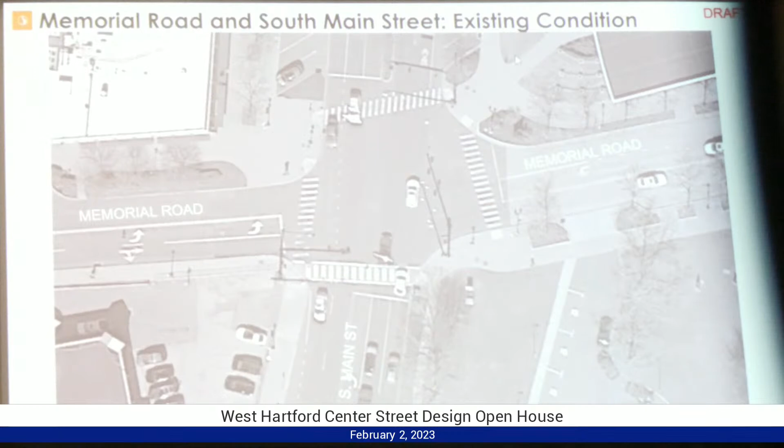This is another one of those locations where, if you really look at what's happening from a traffic circulation perspective, there's a lot of lanes. You can actually really reduce the size of this intersection and still handle all of that volume. Ironically, when I have a small intersection box like that, I can process many cars on every signal, almost as many as a large intersection, because it doesn't take you that long to get across.

I don't need to build in all this safety guidance, extra long yellows, a delay until the next green comes up, and more importantly, the pedestrian crossings become demonstrably shorter. Just look at the distance of these crosswalks versus these crosswalks. So you can get across more quickly, and the whole intersection can operate more efficiently.

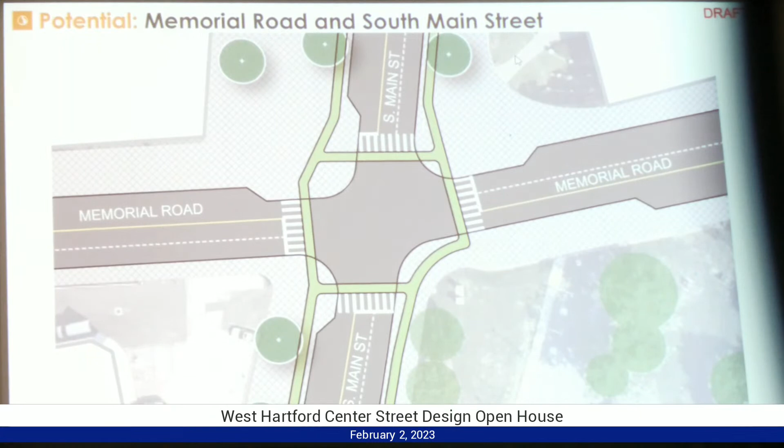We can obviously maybe see north-south cycle tracks in the future along Main Street, as is suggested here as well. And it again becomes a really great gateway point. If we do have better connections on Memorial, people will know that this is a great way to get to Blueback or to Town Center.

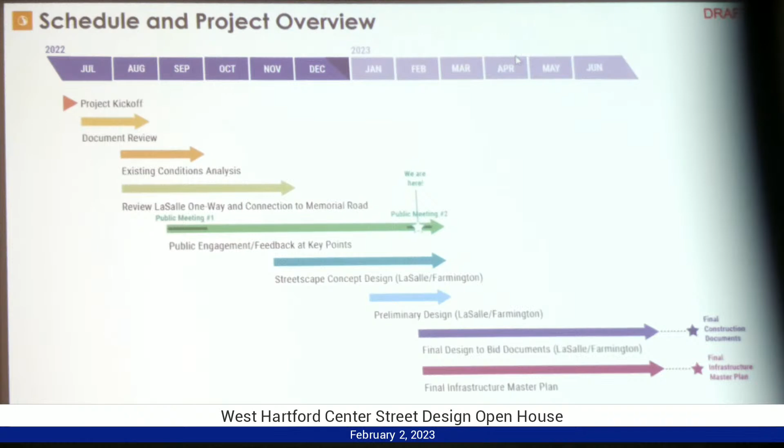All right, almost done, hooray. So next steps for us, we are moving into preliminary design for LaSalle and Farmington, and hoping to incorporate a lot of the great feedback we hear this evening, as well as starting to develop the infrastructure master plan beyond some of the concepts you see here.